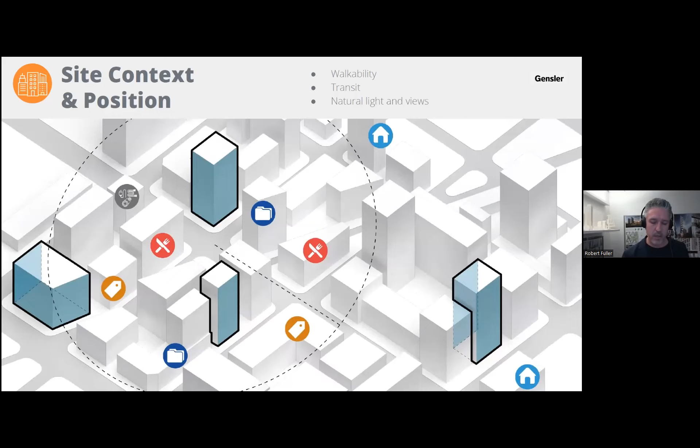So just going through it - first pass, we're looking at the building site context and positioning. Is it in a good walkable neighborhood? Is it near transit? Does it have good natural light and views? We're answering a series of questions that help us, kind of data points that we put in that help us create this score.

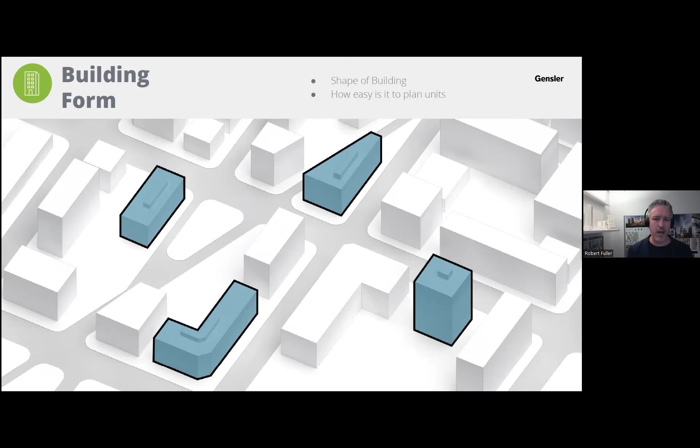The building form is pretty intuitive, pretty straightforward. You try to imagine, without actually getting in there and laying out units, would the building form give good livable units? How easy is it going to plan? Is it an odd shape? Does it have odd ins and outs? The all-important core to window depth - Lindsay hit on this in the previous panel, she talked about the article recently about 180 Water. We're working on 160 Water directly next door to it.

Currently it's under construction and definitely had some challenges of a 1960s, 70s office building with a deep floor plate, and how do you make that into viable units? So we're looking at the floor plate size, the floor to floor heights, number of elevators. In most cases the office buildings are over-elevated as it relates to residential, typically you need fewer of those, but I'd say core to window depth is probably one of the single biggest factors.

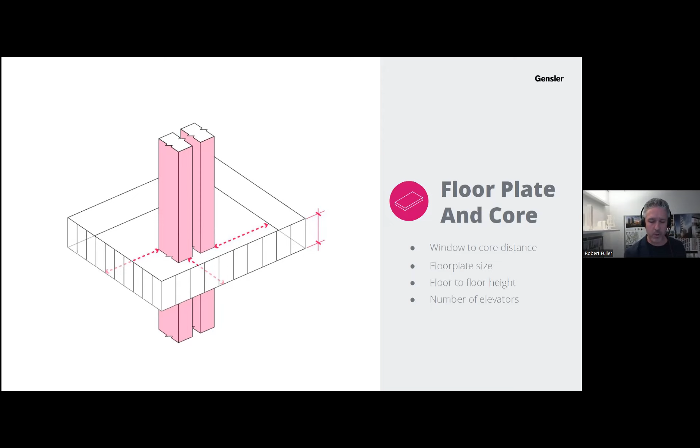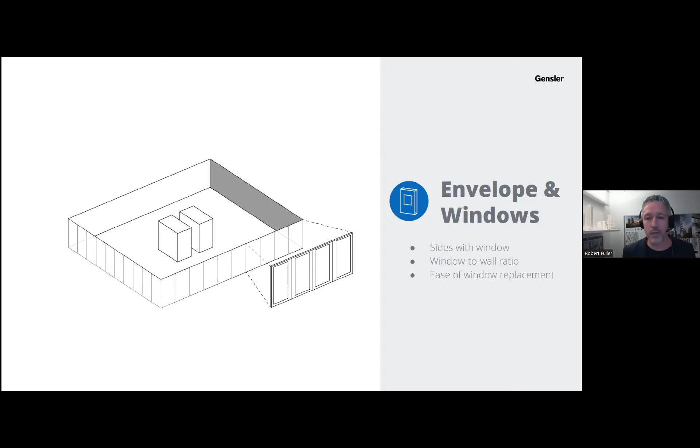Of course, then we're looking at the envelope. Does it have punched windows? Does it have operable windows? We're seeing more and more of these 60s, 70s, 80s commercial office buildings that have old curtain walls that really perform poorly - they're not so easy to retrofit into operable windows. So what is that ease of replacement or retrofit? And then we have kind of a servicing bucket, which quickly highlights the structural system, whether or not it has parking.

Again, this is a tool we're using across North America, so that parking question is much more important in some other cities than it is necessarily here in New York.

And then, without getting into any detailed due diligence, we take a quick look at the MEP system, although what we're finding is that more often than not...

we're replacing the MEP system in total when we're converting to residential. A lot of times these centralized forced air systems that you see in commercial office buildings just aren't suitable if you're converting to residential. As a lot of these panels have been talking about the financing and feasibility of these projects, that's actually one argument that often works in favor of conversion, ironically, because some of these buildings, the MEP systems are at the end of their useful life.

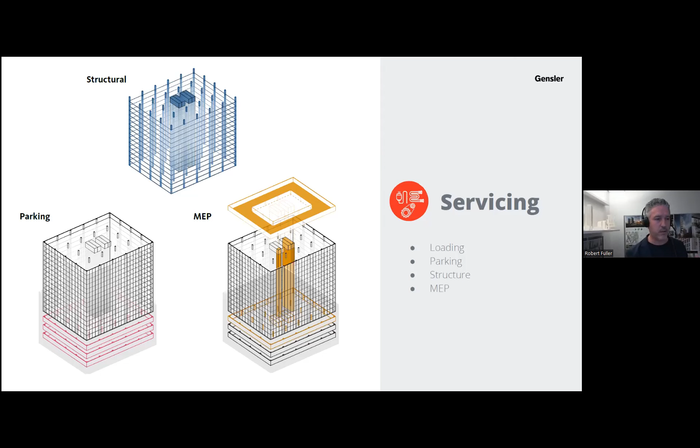And even to kind of maintain current energy standards, even if you were to maintain the building in its current use, there's quite a significant amount of capital investment required. So often the full replacement is not such a big deal.

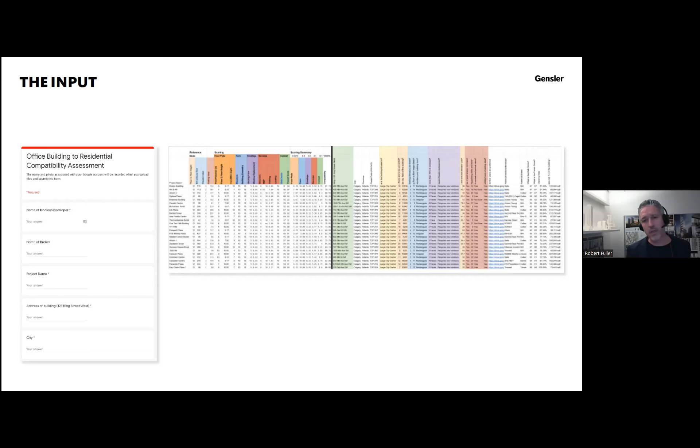And then what we do is we have about 25 or 30 data inputs. Again, this is about a quick, high-level assessment, right? Nothing really replaces rolling up your sleeves and digging into it. As we've been doing this for different municipalities and different private developers around the country, we've now got about 700 buildings, John, in our database. I think we studied about 130 in New York City, and that's rapidly growing.

And what we try to do, again, the goal of this is to create what we call a compatibility score. This is a dashboard of the Calgary study when it was in process. At this point we had 25 buildings from Calgary in the study. I think we ended up studying over 50 for them. It's an interactive dashboard where we can click on a specific property and go to its scorecard, and you can see how it scored in each of those 5 categories.

As a very general rule, as we've been doing this more and more, we kind of say if a building scores at 80% or higher, it's probably a pretty good candidate, checking a lot of the boxes in terms of how it will physically lay out as a residential building. Between 70 and 80, maybe there's some compromises, some challenges, but it's worth looking into more. Buildings in the 60s or below, I don't want to say it can't be done, because anything can be done with time, creativity and money, but those might not be the ones you want to spend your time focused on.

And that was exactly the goal of this for Calgary - they wanted to identify their 10 or 15 best candidates and really dial in on them. Ultimately what they wanted to get out of this was to figure out what their incentive program was going to be - what were they going to provide to developers.

Now their incentive program ended up being pretty straightforward. You can see here they were offering, in their phase 1 priority area, which they highlighted, several building owners applied. I think they have 6 projects that were identified that are moving forward now. It is worth noting they did not have an affordability requirement on this, which is another layer to this whole thing, but it was a very straightforward, streamlined approach.

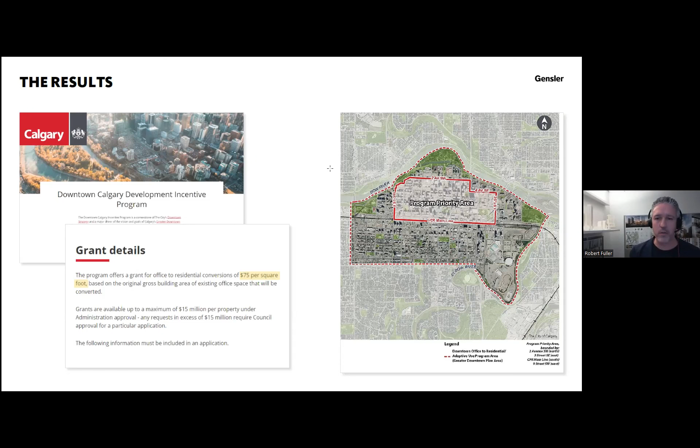Obviously with COVID and all the challenges that many of our cities are having, this has been, as I said at the beginning, the topic for everyone.

It'll be interesting to see if this results in a wave of actual conversions, because as many buildings as we're studying, there aren't that many happening right now. I think that's because financially it's tough to make pencil out. The basis cost you're starting with in New York is a tough starting point to make these things happen.

We've all been seeing the mayor give his press conference at 160 last week, his latest salvo to the state. We're going to need close coordination between the multiple dwelling law, current zoning, and a thoughtful mix of incentives, regulatory changes, and affordability requirements to see if this really takes off.

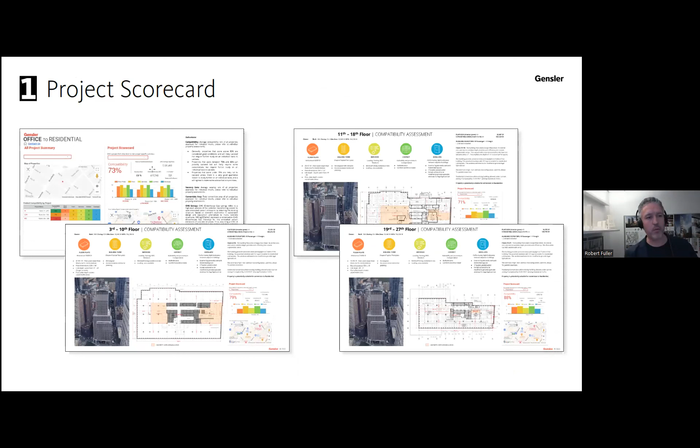If a building scores favorably, we go to the next step where we start doing very basic demising and test fits to get that net to gross ratio. Oftentimes the client has no idea what the unit mix might be.

It's interesting—we're really sensitive, as architects, to wanting to do good quality livable units. There's a qualitative aspect to this, and we do see a lot of people just trying to shoehorn units in, so they become these long, deep units. Are they really the most livable? That's always a balance as we go back and forth.

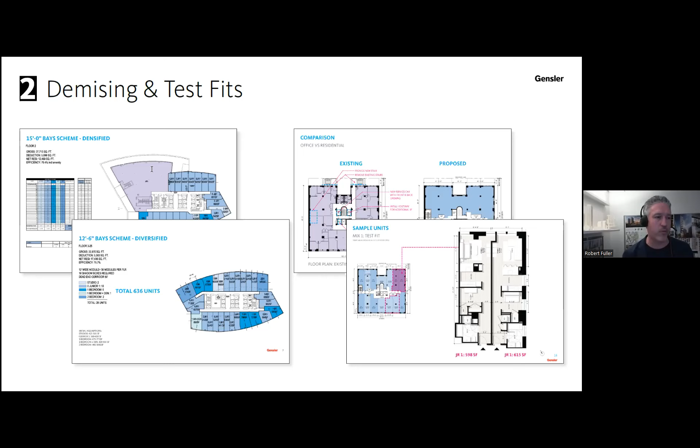So we'd love to see incentive programs that make sense, that don't feel like what people call giveaway programs, that work with the development community on common sense incentive programs that can help move this forward. So quick takeaways: under the right circumstances, these are feasible if the building makes sense.

We think this is one important step to addressing the housing shortages we've all talked about. But like I said a minute ago, the success of this will ultimately come down to the details—whatever zoning amendments, incentives, and affordability requirements get layered into this discussion.

Close coordination between the state and the city is important. Also, this is Gita's territory—we'll talk about sustainability and resiliency, but we think that's huge here. We're actually building into the tool an estimated embodied carbon savings from adaptively reusing these structures, which we think is a great story, especially as more lenders have their own ESG commitments and goals. We think this could have a good impact not only at the building level, but at a neighborhood and citywide level, as we talk about taking districts that were purely commercial and making them a bit more mixed use in nature. So I'll end there, try to keep us on schedule, and jump to the next one.

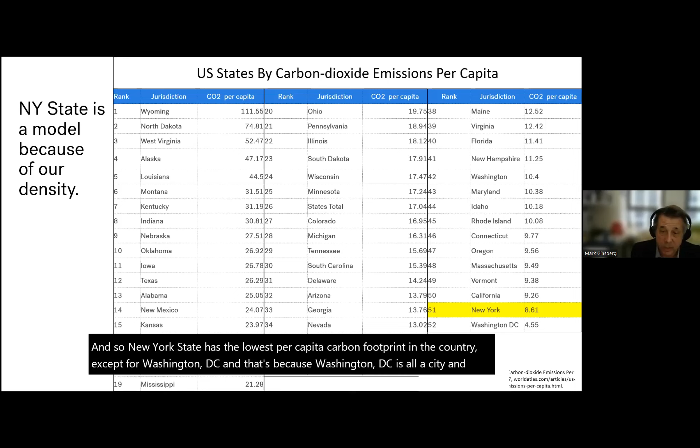In New York City, 70% of the carbon footprint is from buildings because of our density, while nationally it's 35 to 40%. Getting into carbon footprint, I want to point out that I'll talk about density, but the other major factor in carbon footprint per capita is wealth. New York State has the lowest per capita carbon footprint in the country, except for Washington, D.C., and that's because Washington, D.C. is all a city. If we had New York City alone, my guess is it would be significantly lower than Washington.

It's hard to get data correcting for wealth and looking at carbon footprint, but what I did here is compared Scarsdale, which as it happens is where John grew up, to Tribeca, which are both very wealthy neighborhoods, one in the city, the other not. Tribeca's carbon footprint per capita is less than half of Scarsdale's. So I think there is a clear message here: we need to densify.

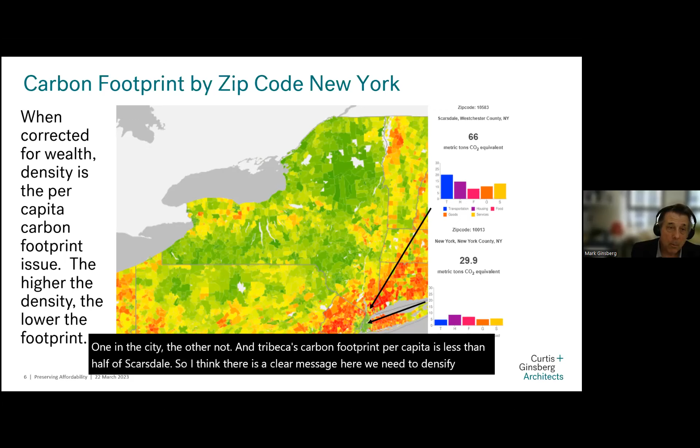In addition, we're going to talk about things like sea level rise. But the way we minimize that, the city and state have Local Law 97, and the state has a similar act. The city has banned gas in new construction between 2025 and 2027. The state has proposed that, and also proposed that any fossil fuel appliances, stoves, boilers, etc., will be banned from sale in 2035. So the writing is on the wall, but we're going to need to electrify.

But we need to improve the envelope. First, this is a slide on passive house principles, and we've done 7 passive house buildings which meet the 2050 requirements today. The first thing you do is have a really well insulated envelope, control solar gain, and deal with thermal bridging.

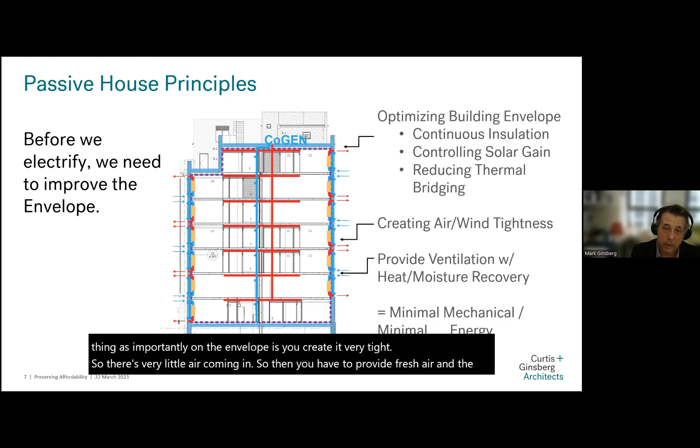The other thing, as importantly on the envelope, is you create it very tight, so there's very little air coming in. So then you have to provide fresh air, and the exhaust air, you want to recover the heat. And then you minimize mechanical.

This is Baychester Murphy, one of the houses in Baychester, where we overclad with EIFS continuous insulation. This, along with new windows and roof insulation, cut the energy consumption by about 20% without doing anything else. It also put the existing deteriorated brick facade within an envelope, so it never went through a freeze-thaw cycle.

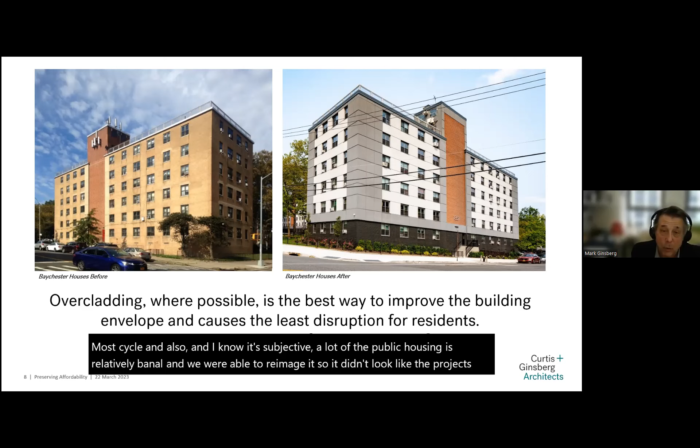Also, and I know it's subjective, a lot of the public housing is relatively banal, and we were able to re-image it so it didn't look like the projects. I realize for important historic buildings, this would be a no-no.

This is PS 90 that we converted. It had been abandoned for 40 years, and we converted it into 75 units of housing, of which 20 were affordable, and the home for the National Dance Institute. On the left, you can see the before and the after.

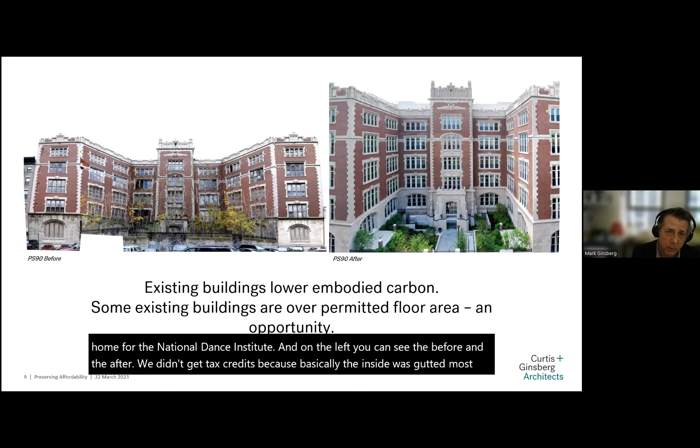We didn't get tax credits because basically the inside was gutted. Most of the slabs had to be replaced, but it preserved. Also, we had to go to the BSA for permission to convert it because it was over FAR.

But this is an important point with historic buildings: not only can you save the embodied carbon, but in a significant number of cases, you can save a building bigger than what you'd be allowed to replace it.

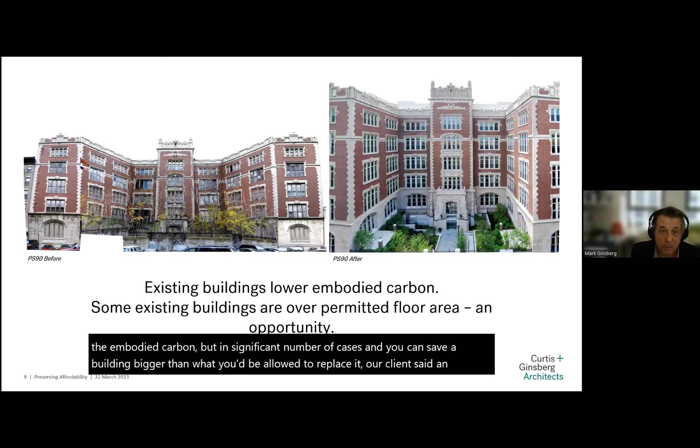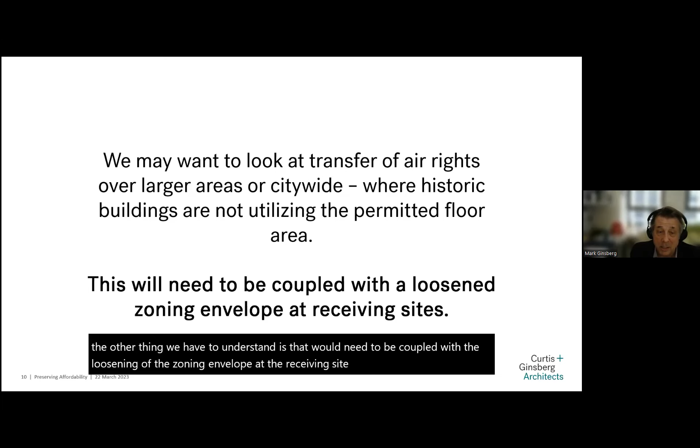Our client said it ended up being more costly than building a new building, though, so it's not a simple answer. We may also want to look at, with landmark and historic buildings, an ability to transfer air rights over a larger area, because often they're landlocked and can't transfer them. But the other thing we have to understand is that would need to be coupled with a loosening of the zoning envelope at the receiving site to make it possible to transfer a significant amount of air rights.

And finally, following up with what Bob said, we need the money. This isn't cheap. So we've talked about historic building tax credits, which don't always work, but where they work can be great. Right now, there are proposals for a 421A-like program. There are a number of programs, but our basic problem is our property taxes are extremely heavy for residential rental buildings. And if you don't have some sort of incentive, it doesn't pencil out.

In addition, as we electrify, which is significant cost, we're going to have to figure out how to help the owners be able to pay for it. And with that, thank you, and I look forward to questions.

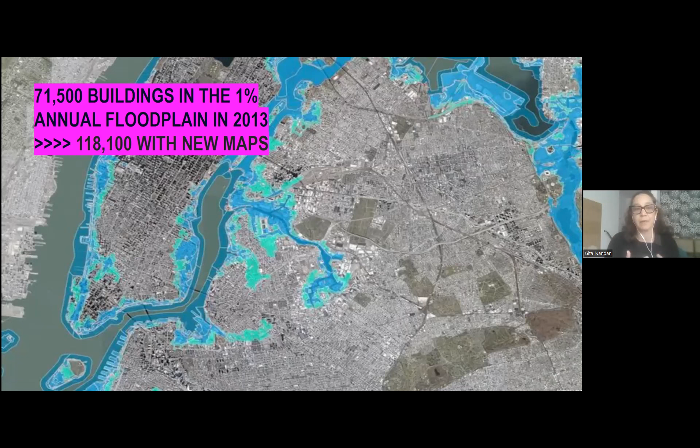So where we are here today: energy resilience, what Mark just talked about, looking at water and stormwater management with existing structures and landscapes—that is literally the trifecta. And if we can consider those issues, that's the trifecta of creating a better future.

Robert just talked about how our mid-century office buildings maybe do not have that. But we have to think about what is the existing fabric that we have, what are the attributes, and how can we take advantage of those elements to create future-proofing of the city.

In our office right now, we work on a whole number of different scales, from warehouses and manufacturing spaces to residential. We happen to be working on a lot of historic buildings right now, this sort of mid-range townhouse—not affordable housing necessarily—but these historic structures are coming up a lot right now, originally built in the 1800s.

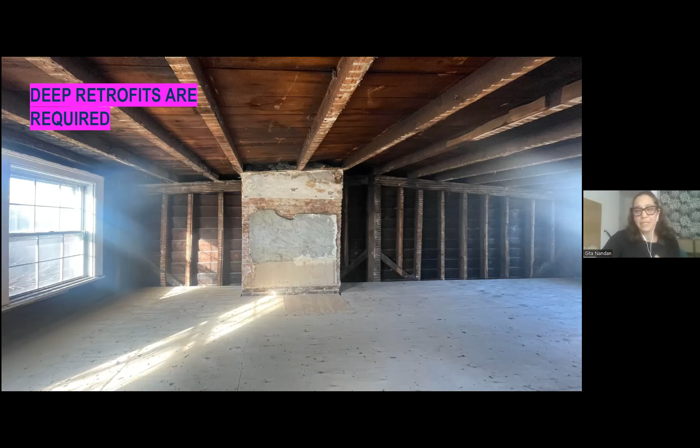Insulation, new windows, and what ends up being a really critical aspect is the electrification. All of these projects are now going to be 100% electric, dealing with HVAC systems and split units and being as energy efficient as possible.

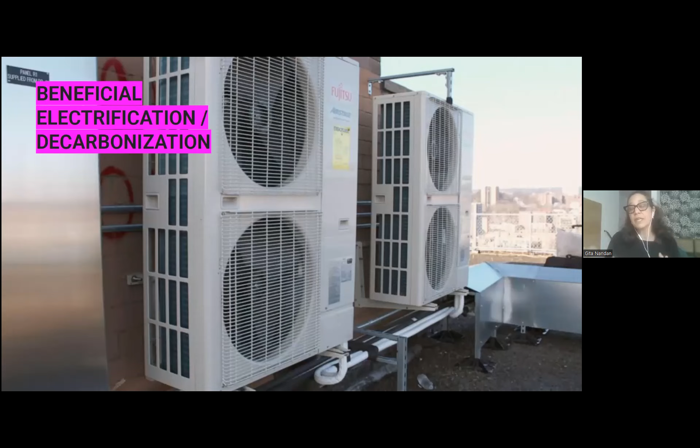In terms of resilience, a lot of these mechanics have to go on the roof. And so when we start thinking about the roof, Local Law 92 kicks in—your roofscape ends up being one of the most critical areas of a renovation.

And Local Law 92, in a way, is beneficial in that it's really pushing New York City renovations to address a sustainable roofscape with green and solar roof requirements.

On larger buildings, we're able to achieve maybe resilient power hubs or community solar arrays. And on smaller systems, we're able to think about how we create a net-zero type of building. The roofscape is just an asset, but realistically it ends up being one of the most critical parts of the renovation.

And so restructuring, dealing with the types of new membranes, and also making it a very beautiful habitable space goes hand in hand with the approach of being able to use that as another asset to a building. Thinking about the roofscape not only for energy production, but also stormwater management, green roofs are a critical asset to that.

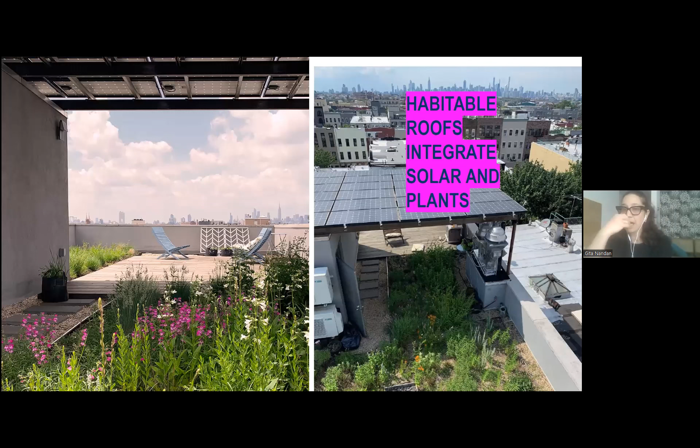For most existing structures at this mid-level scale, you don't have a lot of lot area. So the area that you're going to rely on is really the roofscape in order to meet stormwater management needs, and then integrating both solar and green roofs together. That's an approach of ours that feels very efficient if we're looking at density, but being able to marry those two together just makes sense.

And if you create these solar roof canopies that fly above the roof line, you're able to embed a green roof below, and you can actually have the two of them work hand in hand together.

And then if you're working on a larger scale with more commercial based retrofits, we have been doing power hubs in which you're creating a building microgrid system. So you're taking that building almost offline, and you're able to create solar arrays and green roof systems that then marry with battery backup systems, so they can be off grid and offline in the event of emergencies. You can start to create that and connect it into a community power hub system as well.

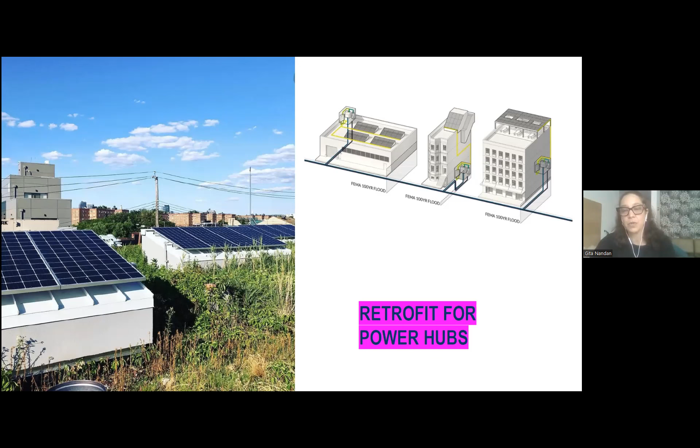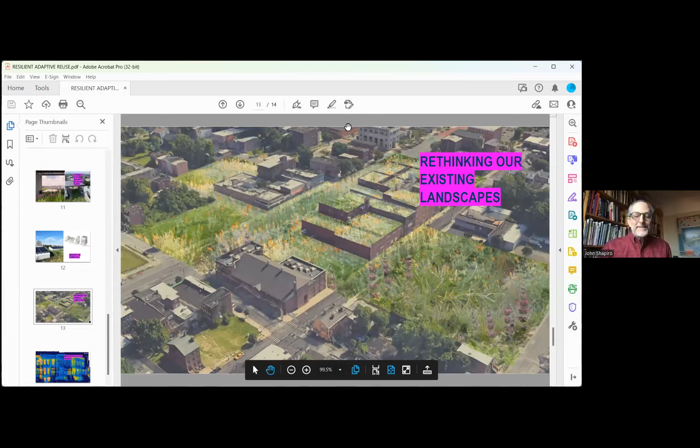Okay, thank you. One question that came in, Robert: can you give us a sense of proportion in any of these cities, Calgary in particular, of how many housing units might be going forward in the immediate future that you project could be created in total? And maybe put that in perspective of the size of the city—saying 5,000 units in New York versus 5,000 units in Calgary are two quite different things.

Yeah, it's a tough one. I answered in the chat, one of the questions—in phase one, 6 projects have been approved, and collectively it's not even 1,000 units, right? It's 700 and something units. So it's debatable whether that's really starting to move the needle. I think this first pass at it, they had a relatively small geographic area. But I think you need to start getting into—for Calgary, they never really had a minimum threshold they were trying to hit. But I think they would probably have to start hitting 3,000-4,000 units before it really started to have the impact that I think they're hoping for. But obviously that's a much smaller city than New York.

So I think for us, 2,000-3,000 units is sort of a couple of large projects, right? 160 Water, we're getting 600 units in that building alone, versus the 700 units collectively across 5 or 6 projects in Calgary. So they're definitely operating at a different scale. They have a lot of smaller buildings, and it's just going to take more time and more projects to apply to it. So I think part of it too is getting the message out and getting more people in the know about the incentives that are available.